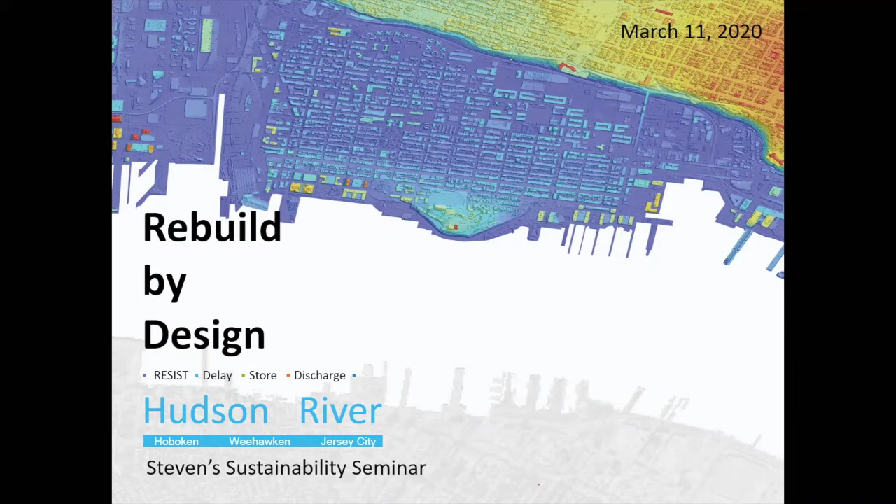Thank you so much, Dibs. And I'm honored to be the first guinea pig, honored to be the first person to be doing this remotely.

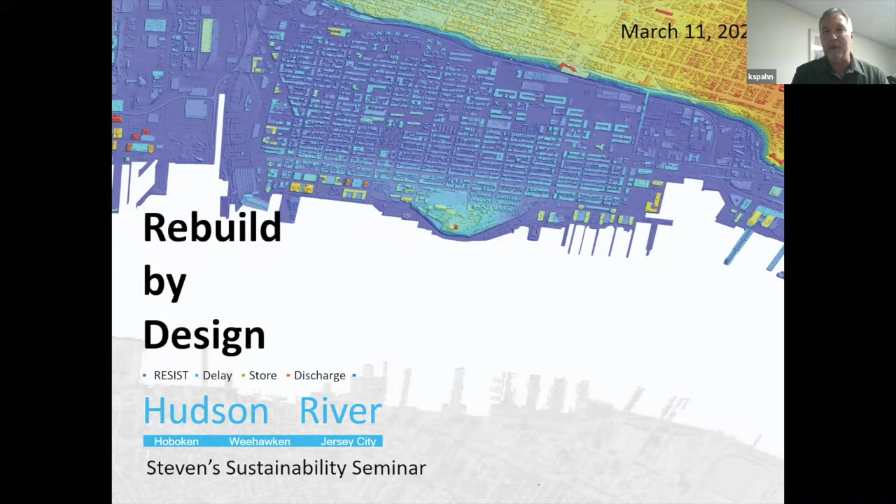So just to go over what we're going to talk about today: I'm going to touch on Superstorm Sandy, since you guys have probably heard a lot about that, but I'll give it from my perspective. I'll talk about the Rebuild by Design competition, which was a large competition for the tri-state area. Then I'll talk about the Rebuild by Design Hudson River project, covering Hoboken, Weehawken, and Jersey City, get into the feasibility aspects and the NEPA process, all the public outreach, how we got to a preferred alternative, and show some results from the flood modeling for storm surge and rainfall.

So, good old hurricane, or Superstorm Sandy I guess - technically I've heard both. I think when it hit it was technically a Category 1 hurricane, and the center of it was right about Brigantine, New Jersey. It was really the worst possible situation because the right side of the storm lined up perfectly with New York Harbor between Sandy Hook and Long Island, which created a funnel effect. We were lucky it was only a Category 1, because it also hit at high tide on a full moon tide, so tides were higher than normal at the time. We ended up with 13.88 feet above normal at the Battery. So it truly was a difficult storm.

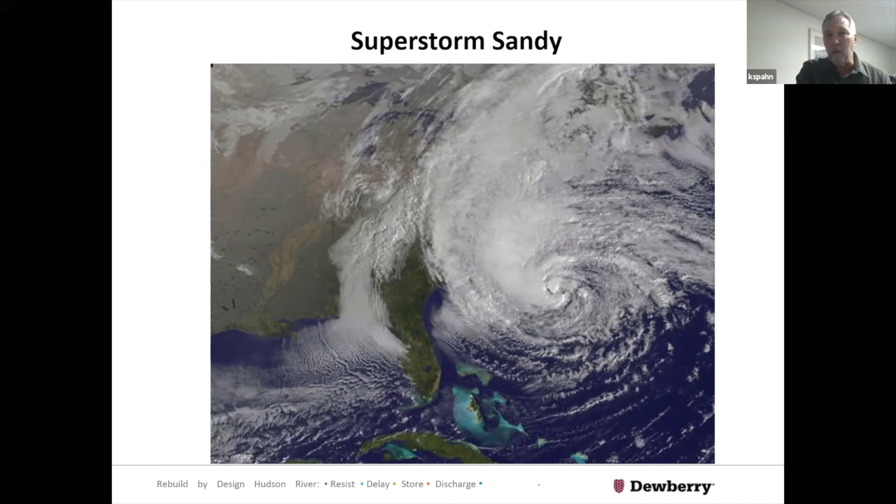These are just some images from the port, because I was so closely involved with it, I figured I'd share it. Containers were strewn all over the place, and some ended up in the water. We had a barge up on the dock in Port Newark, bottom left, you can see the date, November 1st. We also had a snowstorm about a couple days after Sandy that was sort of insult to injury. And in the bottom right, we had a lot of asphalt torn up out in Port Jersey as well.

We had several thousand vehicles that were destroyed as a result of the storm. These were brand new vehicles imported into the port, including Fiskers that got wet. After they started to dry out, there was some corrosive reaction between the batteries and the salt water, and they actually burst into flames. So it was an interesting time. The port was closed for about 6 days, but it really took 6 months for the port to fully recover.

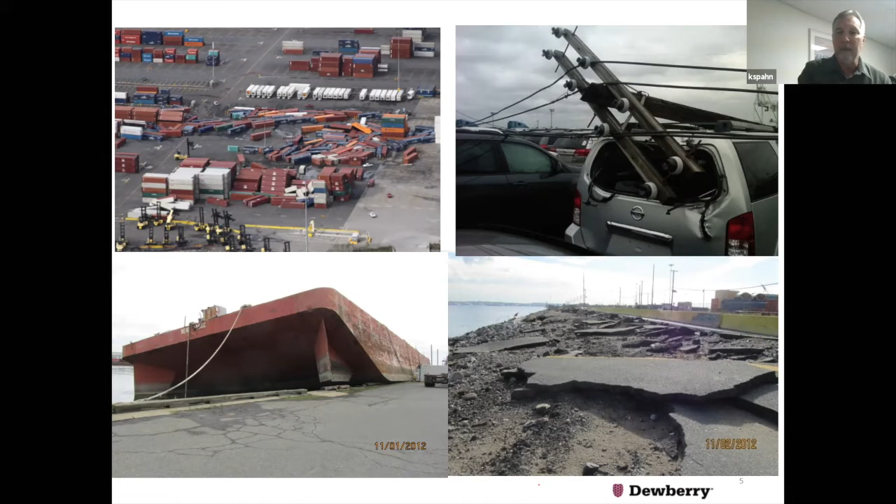So then we're going to move on to the Rebuild by Design competition. I just want to talk about it because I think it's an example of good government. After Sandy, in June of 2013, the Department of Housing and Urban Development of the United States government launched the Rebuild by Design competition, a multi-stage planning and design competition to promote resilience in the Sandy affected region. HUD administered the competition in partnership with philanthropic, academic and nonprofit organizations. Rockefeller Foundation had a lot to do with it, putting up the money for stipends so consulting teams could get paid for their work developing ideas on how these regional areas could recover from or prevent a Sandy in the future.

The goal of the competition was to promote innovation by developing regionally scalable but locally contextual solutions that increase resilience in the region. So in June 2014, $930 million was awarded to 7 different projects. I think there were 10 total submitted, and 7 of them received money. One of those was the Rebuild by Design Hudson River project, for Hoboken, Weehawken, and Jersey City, which we're going to talk about.

I love this image because it was in the package submitted for the competition, and it shows a hot air balloon in the background, a very active waterfront area, an elevated area with people walking around and kayaking and so forth. It was great to win a competition, but this image is not in reality what could practically be designed and implemented. It's just not, and we'll talk about that a little bit, because of the costs of waterfront work, the ownership of the waterfront, and the impacts to view sheds and different things like that. It's a wonderful image, but not really realistic, though it won the competition.

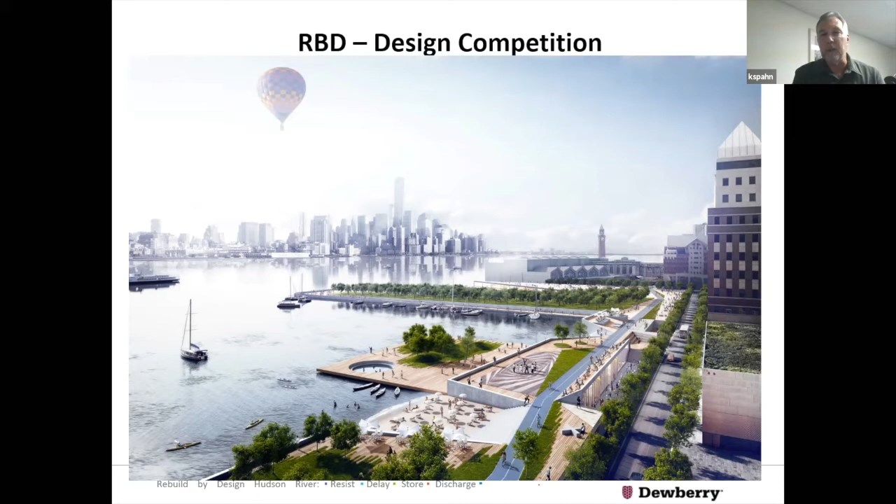So the other main theme of the winning competition, and what we had to start with when we began our feasibility and NEPA process, is resist, delay, store, and discharge, RDSD. The idea is to develop a comprehensive urban water strategy by creating infrastructure to resist storm surge coming in like it did before, and also infrastructure to delay rainfall getting into the storm system, potentially store rainfall so it's not overwhelming the storm system, because Hoboken actually has a combined sanitary and storm system that's ancient, so it does not drain properly. They need more capacity in the system, so the idea was to delay it, store it, and then discharge it mechanically into the river to get it out, making more room for additional capacity.

But that was the key to this project: resist, delay, store, discharge.

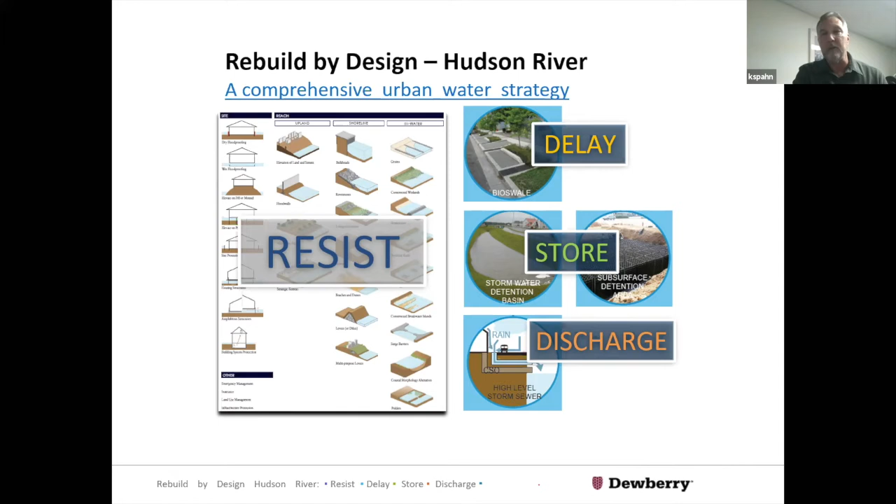So to talk a little bit about the study area: City of Hoboken, parts of Jersey City, Weehawken, about 1.8 square miles, population roughly 63,000 people. This was a number of years back when we started this. There's a major transportation hub in the New Jersey Transit at the south end. Down at the south end there's a little blue line that shows the project area. This is Weehawken, Hoboken in the center, and Jersey City down at the south end. High residential density.

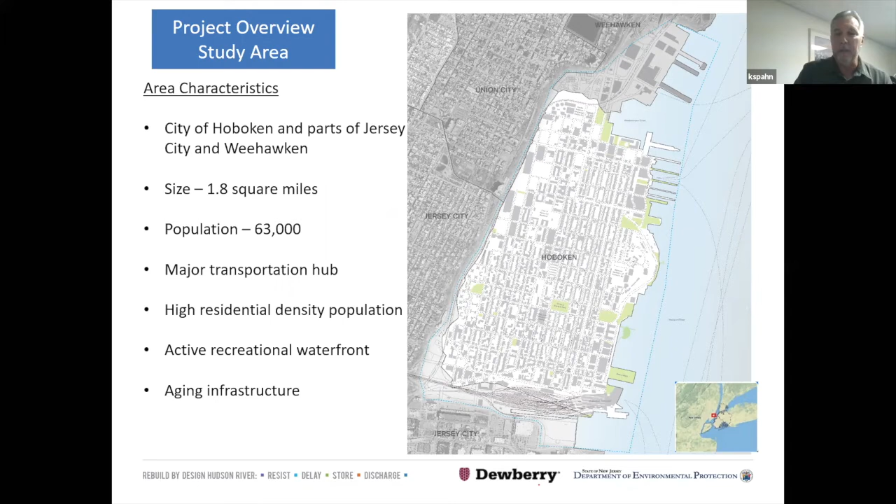It's one of the most densely populated areas in the US. Super active recreational waterfront that we learned a lot about through this project. And then the other piece of it is aging infrastructure. The waterfront infrastructure is not in the greatest shape, so if you're going to build anything on the waterfront, you really need to rebuild the waterfront. And the inland infrastructure, the sanitary system and storm system is old. You guys probably hear about water main breaks in Hoboken.

So flooding risks in this area - the top two images are from Hurricane Sandy, and you can see going underneath the bridges coming into Hoboken from Jersey City, the area was just inundated with flood water. Luckily it didn't rain much, it could have been worse. Hurricane Irene did not have the storm surge effect that Sandy had - it hit at a low tide. However, they dumped over 5 inches of rain in a very short period of time. So some areas flooded almost as bad during Irene as they were during Sandy.

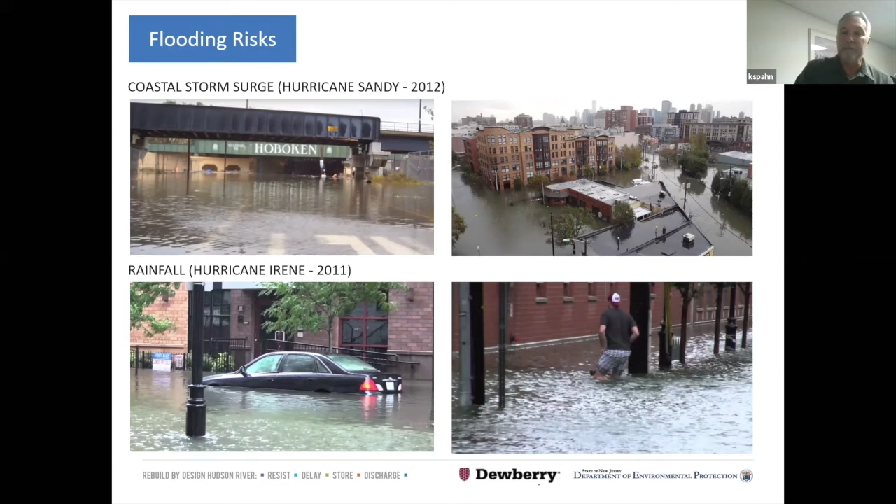So why do we need the project? This is a map that shows the 100-year FEMA flood area, in blue. Most of Hoboken is in that 1% annual chance, meaning there's a 1% chance basically every year of this 100-year storm coming and flooding that area. Where Stevens is located, Castle Point is the highest area in the city. I'm told that when the Dutch settled this area, a lot of that blue area was swampland and was filled in over the years, so Castle Point was more of an island.

Then there are some crosshatched areas that show where we have rainfall problems, where there's no storm surge but you get a heavy rainstorm. These are hot spots where it's a problem locally. The damage from those rainstorms isn't like the damage from a major storm surge, but it's still nuisance flooding that needed to be addressed with this project as well.

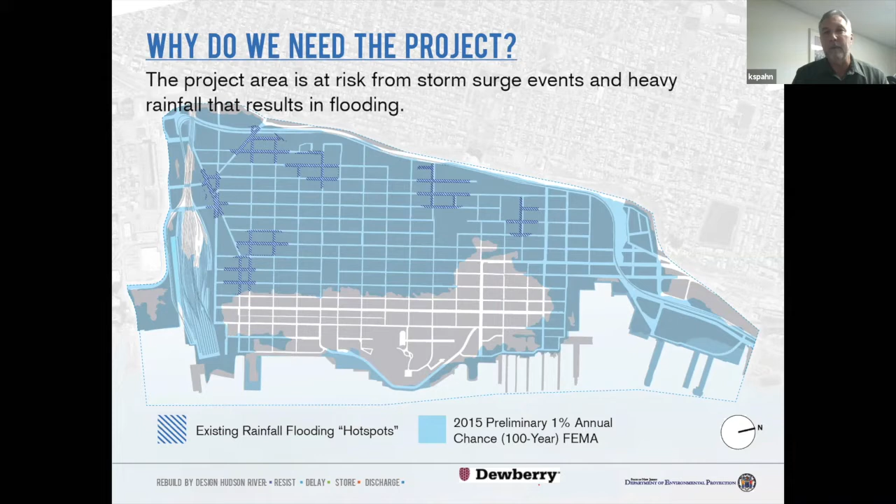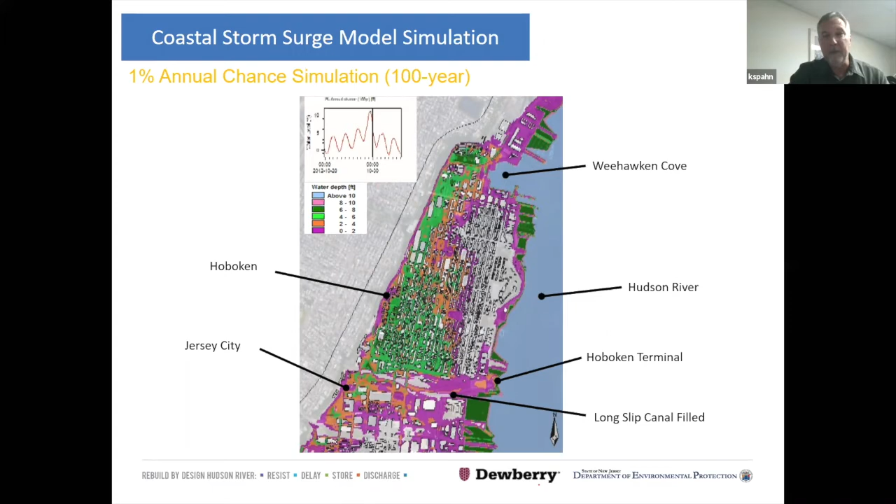To talk about the overall project schedule: when we started, the Rebuild by Design competition was in June 2014. It took about a year for that award to get made, and then some time for us to get on board and start the feasibility and NEPA process, which was really a 2-year process - very short for NEPA. What's key is the engineers working on feasibility have to work very closely with the planners working on the NEPA process, because the engineering information feeds the NEPA process. That's really important for them to be in sync in order for us to compress the schedule. Often this could take 5 years, or a lot of the engineering work needs to be done up front before you can even get into the NEPA process.

And then the final design has been going on - it's pushed out a little bit. I think they're getting ready to award a construction this year, not 2019. That's not surprising because this is a very complicated project.

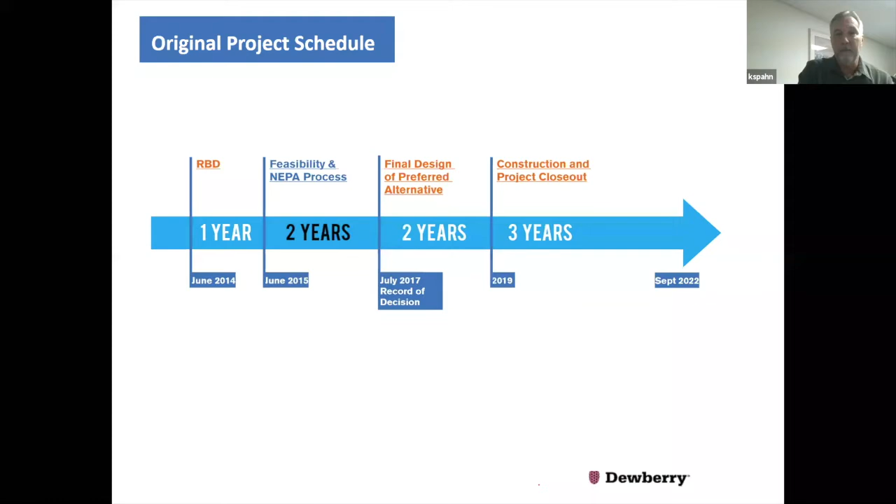So just to talk a little bit about NEPA, what it is: NEPA was created by an act of Congress and authorized by President Nixon in 1969. The idea is it ensures public participation and involvement with projects that will affect both the built and natural environment, to minimize impacts and stimulate health and welfare of man and the ecosystems. So anytime you're doing a project, particularly using federal dollars, which is what this 230 million is, you've got to go through NEPA. Whether that changes in the future or not, who knows.

But you start out with, what is the purpose and need? The idea is to get people involved—public involvement is key to the entire process—and people that live and work in these areas agree on why we're doing this and why we need it. You need to develop your scoping: what are the goals of the project, how do you want to end up, and what are the deliverables?

And then talk about what's the environment that's affected, what are the impacts, and how can you mitigate it. And then look through different alternatives and different ideas. Finally, come up with a preferred alternative, and then there is an actual record of decision where there is a public hearing. It's actually the only required public hearing for the record of decision, but it's better practice to have several public hearings through the process. Once the record of decision is signed, the project is approved to move forward.

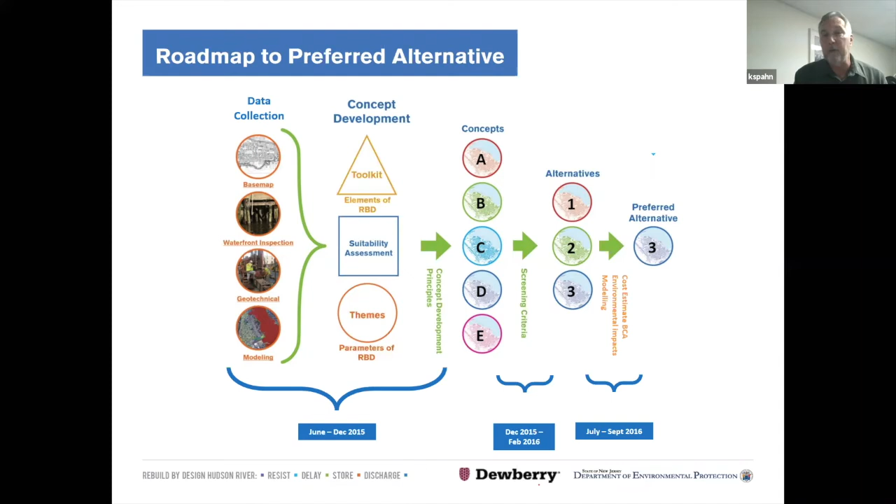Things you need to consider when you're developing the different components of this is, what are the existing initiatives? At the time, Hoboken was just starting the redevelopment of Washington Street.

Some things it's okay to be wet. Some things have to be dry. There was a boathouse being planned for the Weehawken Cove or Hoboken Cove area. How would it impact bike share programs? What are the impacts with the views and the height? Are there shading issues? What's the seasonality? What sort of material would be appropriate to use to maintain the urban identity?

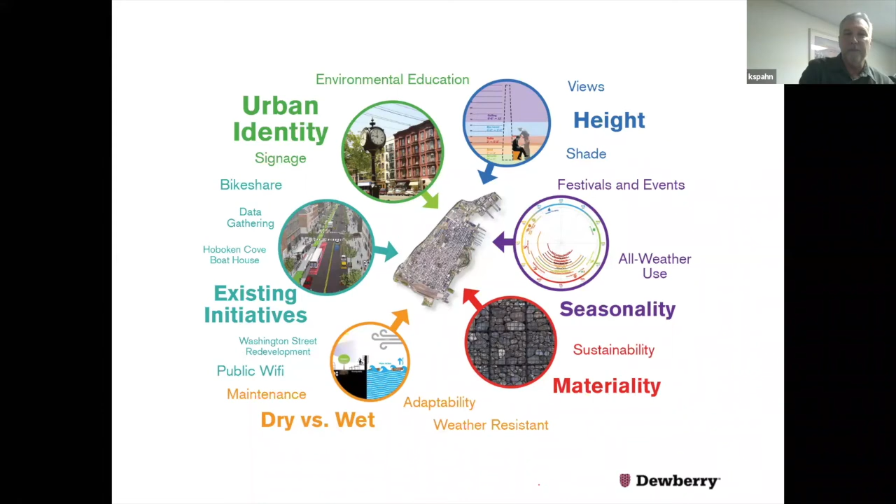Some of the major challenges with this project: number one, it was a very active waterfront. So we learned pretty early on in the project that doing things along the waterfront were going to be difficult for a number of reasons, mainly existing access that people have, views that people have, condition of the waterfront, property rights of the waterfront. But really, it was sort of a sanctity to not do anything to impact access and availability of the waterfront.

The roadways and bridges, it's just a busy area through Hoboken. And when you're looking to create basically a flood revetment around the city or around the project area, you want it to get certified by FEMA so that folks on the other side of that revetment will get a reduction in their insurance rates possibly. So roadways create, through the area, and particularly through wherever the resist features are, create a pathway for water. So it just made it tricky.

And then infrastructure density - there's just not a lot of space to build anything in this project area, so it did create some challenges. Circulation is also a major issue, just for constructability. And things like impacting the number of parking spaces, because they're near and dear to people. So it's important to maintain circulation with whatever you're doing.

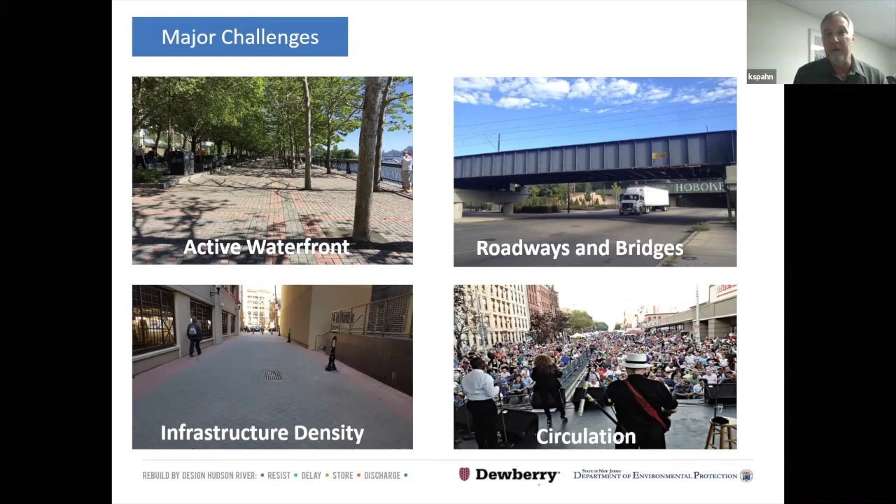So the evaluation criteria we were using - the primary evaluation criteria is the flood risk reduction. We have alternative 1, 2, 3. What level of flood risk do you get from each alternative and how do they compare? What are the socioeconomic and built environment impacts of the different alternatives? How does it affect lower income neighborhoods? How does it affect the waterfront areas?

Then benefit cost analysis is really important when it comes to funding from the federal government, to have a positive benefit cost analysis. So out of the different alternatives, you have construction estimates, cost estimates, and you have the impact of the storm. So what costs are you averting by making this investment, and what does that come out to in terms of your ratio for your benefit cost analysis?

And then, is it constructible? And can you maintain it and operate it? Those are all factors that you're considering when you're evaluating criteria for a different alternative, and then ultimately environmental impacts get looked at across a broad range of different environmental type issues.

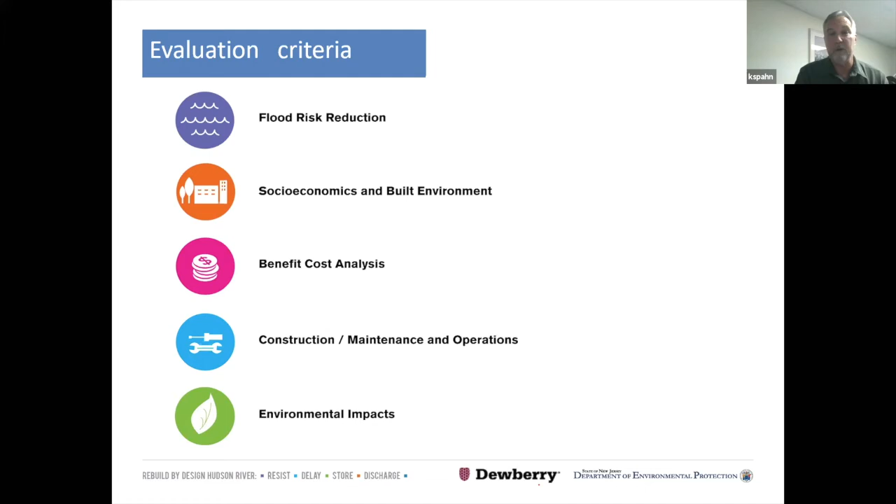So the three resist alternatives that we came up with: alternative one was the waterfront, shown in the orange line, and it would be a rather high structure. The structure could be built into the landscape at some levels, but in some areas there really wasn't enough room other than it just being a structure.

One of the things we learned is we don't call these things walls, these are resist features. But the reality is, in some areas where there isn't room to do anything else, like along the waterfront, it'd be a nice looking wall, but it would end up being a wall. And that is not something that's preferred by people.

The second alternative, like most of these alternatives, started at the north end and tied into the Weehawken light rail station. As you can see, the orange one comes down along the waterfront. Alternative 2 and alternative 3 are more like inland alternatives, very similar. One goes along 15th Street, one stays along the light rail tracks. Then they all come across Weehawken Cove similarly.

The idea was, there's an empty lot here, so the idea is to build a park and build into that park a resist feature, an elevated resist feature, and then the route comes down through an alleyway where there are no vehicles. There were definitely some benefits to this, because it does not affect the roadways or parking or anything coming through that alleyway.

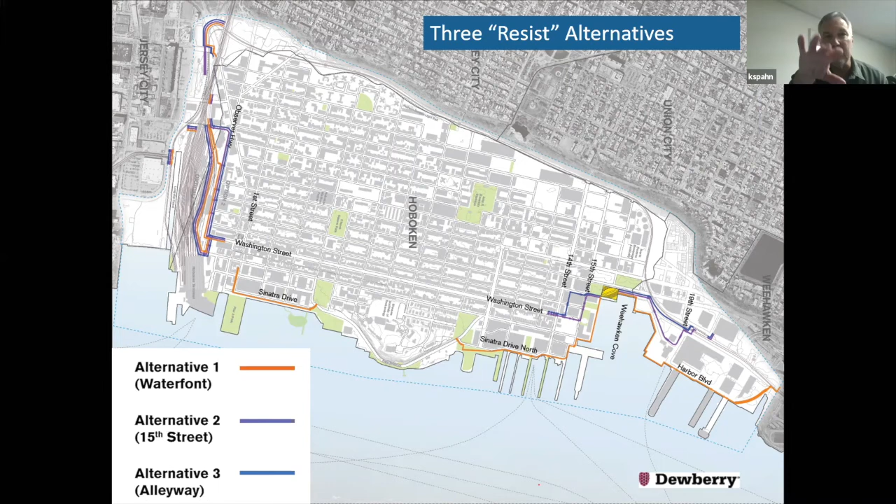So also for delay, store, and discharge, we really only had one alternative for that. Unlike the resist feature, there were some different ideas, but there were basically known areas that flooded in the project area, so there just weren't as many alternatives.

So what we looked at was what we called at the time the BASF site, putting in a below ground storage tank to handle rainfall runoff for the area in the northwest. That just recently has gone into construction. There was a press release a few weeks ago - they call it the Northwest Resiliency Park. So that's actually happening now.

The city of Hoboken was able to move that forward because there wasn't money for that in the Rebuild by Design grant - there was only money for really the resist feature. The idea behind the Rebuild by Design grant was to kind of jumpstart things, but some of what's being recommended here has to be followed up by the local community.

We also looked at a New Jersey Transit site for storage of water in an area that floods in these apartments back here - just calling it the New Jersey Transit site because New Jersey Transit happens to own the property. And also a Block 10 site, which is adjacent to the Southwest Resiliency Park.

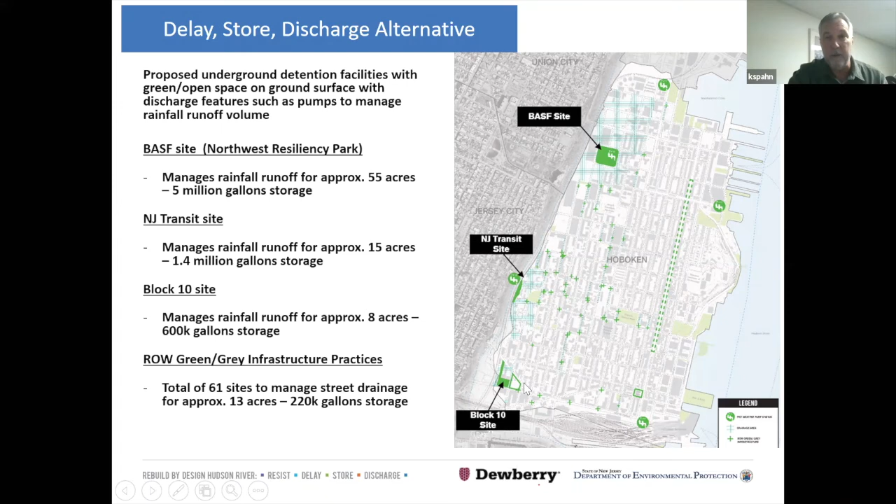There's also a number of things the city of Hoboken has done, and the city of Hoboken is really trying to do a lot to improve flooding, particularly from rainfall. They've added pump stations down in the south end, and a few years ago completed the H5 pump station. They've added some rainfall water gardens on Washington Street, and I mentioned the Southwest Resiliency Park. So things are moving in the right direction in Hoboken.

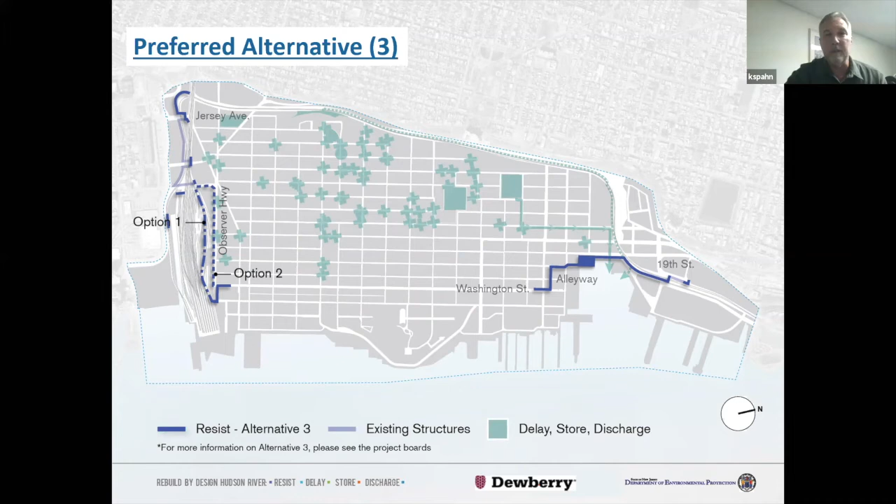So the preferred alternative is the alleyway alternative that goes from the light rail station in Weehawken down across the cove and up a ways onto Washington Street. Then there's a couple of options - they're actually moving to something like option 1 here. And then also all the resist, delay, store, and discharge pieces.

Alternative 3 had a high degree of flood risk reduction while balancing public input, costs, and urban amenities. It can be constructed with the available funds, though that's going to be a stretch. They may need some additional funds, but it was the cheapest alternative.

It had fewer gates, because gates are expensive and are maintenance items, so it had the fewest number of gates of any of the alternatives. That means the lowest annual maintenance and the least impact to waterfront access and views, which is critical to the folks that live there.

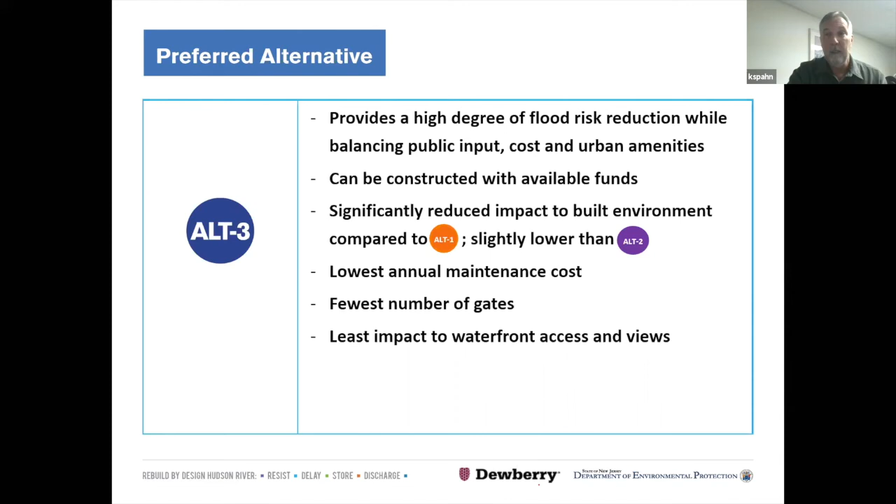Some of the delay, store, discharge alternative features: the Northwest Resiliency is more like a destination, a place where people would go, picnic, and hang out. We looked at more of a passive approach for the New Jersey Transit site, something you can look at that creates a green area to hold water. The Southwest Resiliency and Block 10 is more of an active area, with basketball courts and things like that.

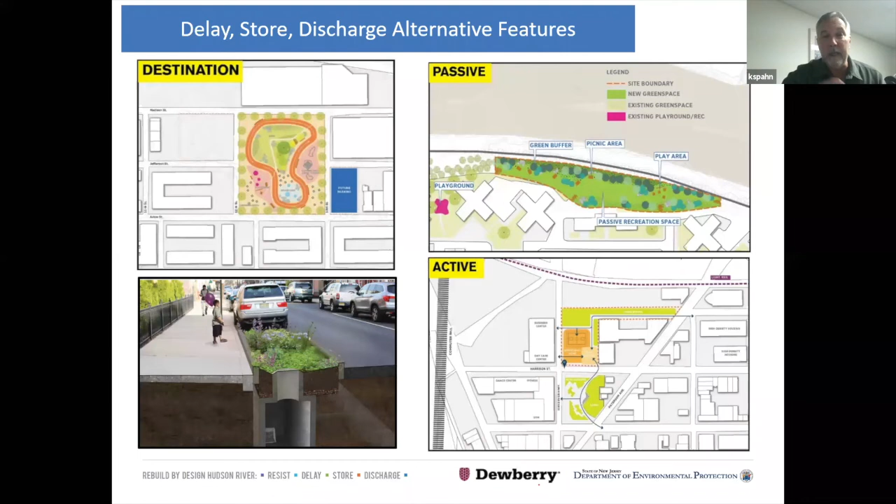The right-of-way sites are just small local features where there could be some bio-attenuation of water into the storm drain, or something else I'll show you in a minute. This is actually an image of the Northwest Resiliency Park that is moving forward today.

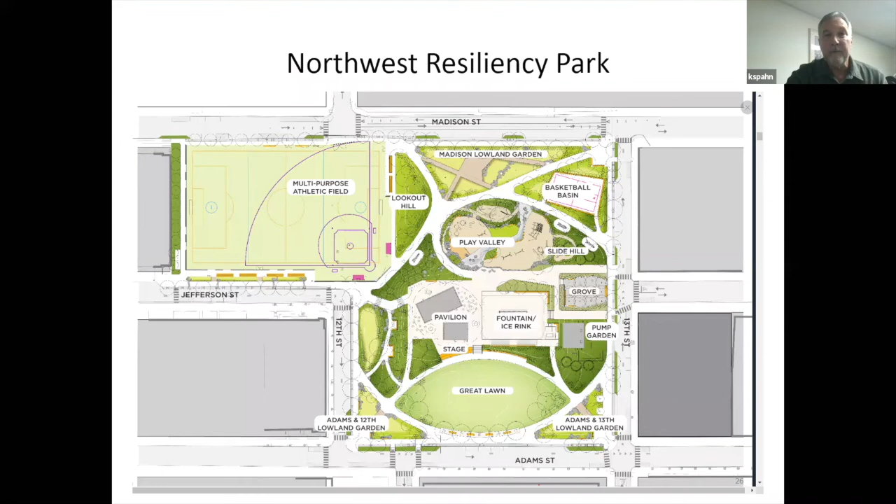So quickly, I'm going to do some modeling here. It's not working. Dibs, are these the technical problems you were talking about? Oh, this one looks more like... oh wait, yeah, I'm sorry, I have the wrong one. You're right, very good, yeah, this is not it. Come here.

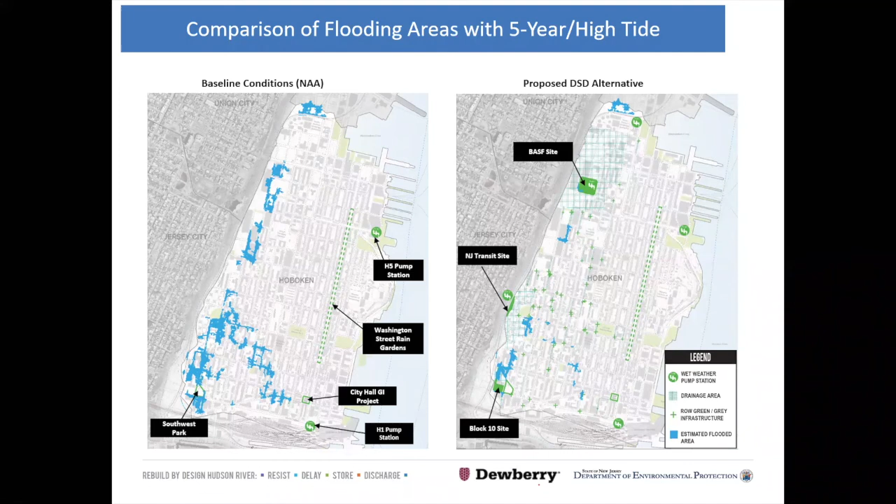So comparing the flooding: this is a 5-year rainfall event happening during high tide. It matters whether it's high tide or low tide, because the storm system fills with water during high tide, so there's less capacity for water. On the left is the baseline conditions with no action, and on the right is with the delay, store, discharge alternatives installed. You can see there's less blue on the right than the left, showing significant improvement with the Northwest Resiliency Park, the New Jersey Transit site, the Block 10 site, and these small right-of-way improvements.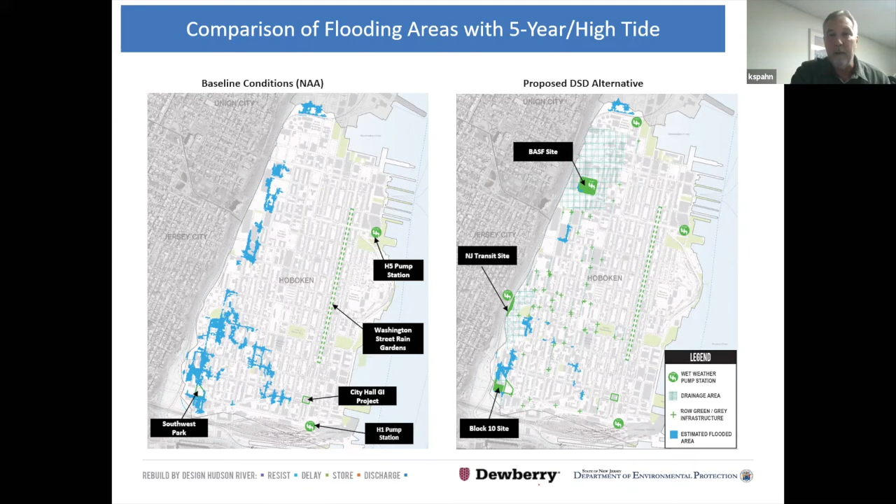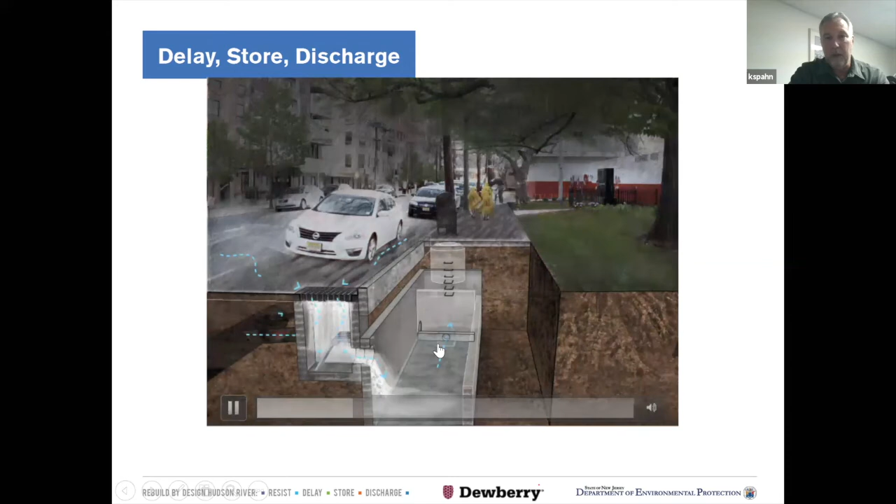This is the model of what we're calling the right-of-way improvement, where you'll see water going into the catch basin, with a tank accompanying it. When it starts to rain, it's a little slow—water fills up, then goes into this hole through the weir, allowing water to get into the storm drain system, but slowing it down. In the meantime, you've got capacity to hold the water.

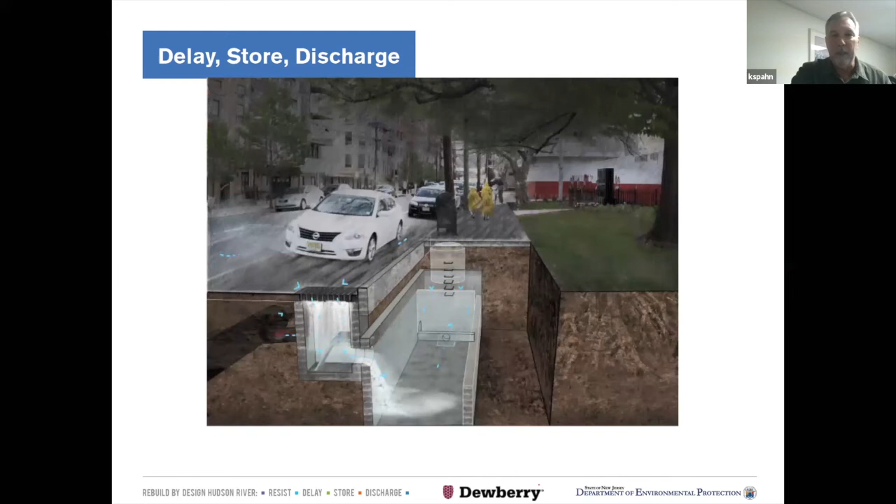You can see it filling up—so during these summertime deluges, rather than it backing up onto the street right away because there isn't capacity in the system, you can hold some of it. But at some point, these local tanks will fill up and spill over the top of the weir. It's just an improvement that adds to the overall resiliency of the area.

Quickly going through the layout: the alignment for the resist feature comes through the park here, goes up Garden Street, then through an alleyway through these buildings where there are no vehicles, and up Washington just past 14th. The idea is to build something that fits into the elements, culture, and aesthetics of the existing buildings and activity happening there.

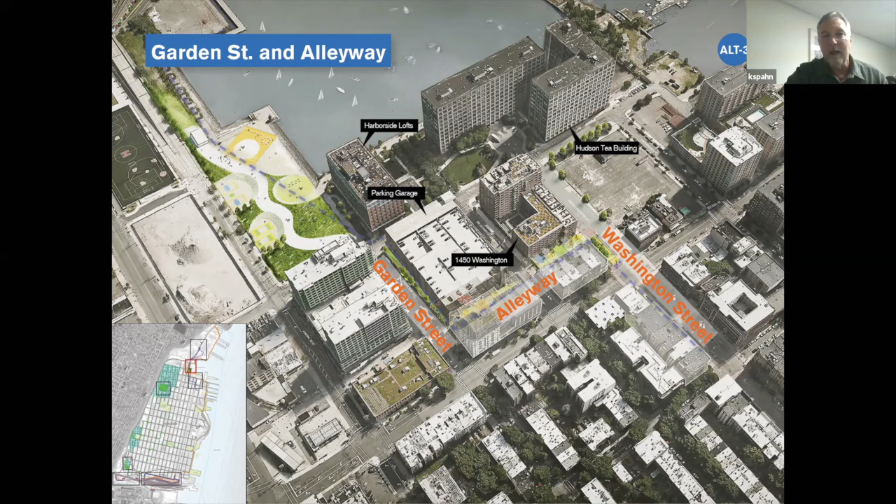This is sort of a before picture of where the park is going to go. As I said earlier, it's an empty lot today, and this is what it will look like in the future.

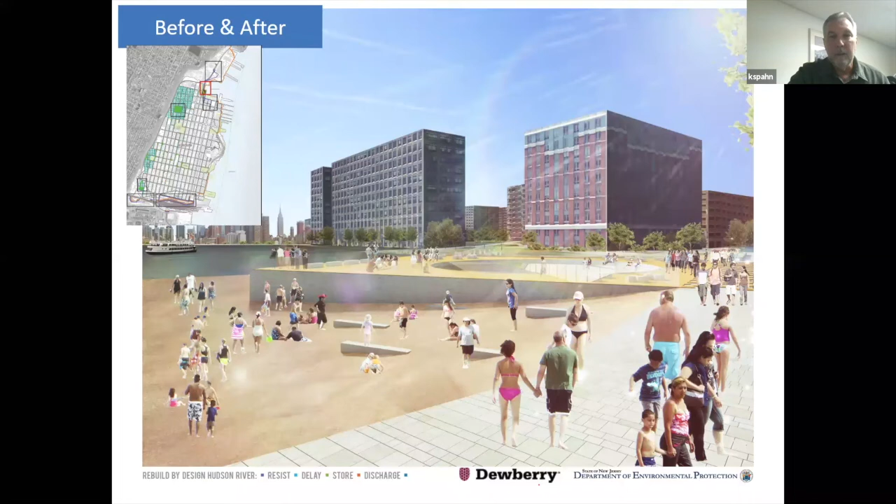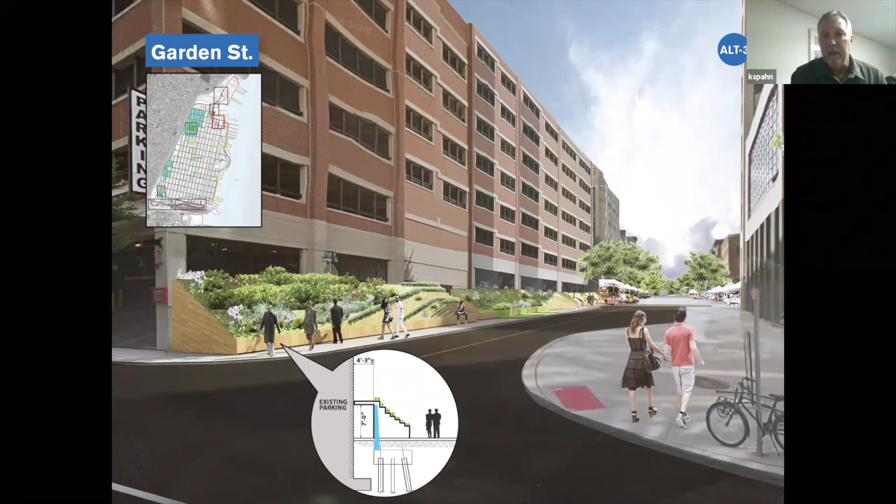This is along Garden Street, up against a parking garage. That planner, and this may not be exactly what it ends up being because they've spent the last couple of years refining exactly what sort of a revetment or resist feature they're going to put here. But this is something that we came up with that people were satisfied with. It could change a little bit from this.

This is looking at the open air market right off Garden Street. Garden Street's kind of a dead end. So this is the area of the open air market, and we're looking into the alleyway heading east. This brown planter is an idea for the resist barrier. In that area, the resist barrier is only 2-3 feet high, maybe.

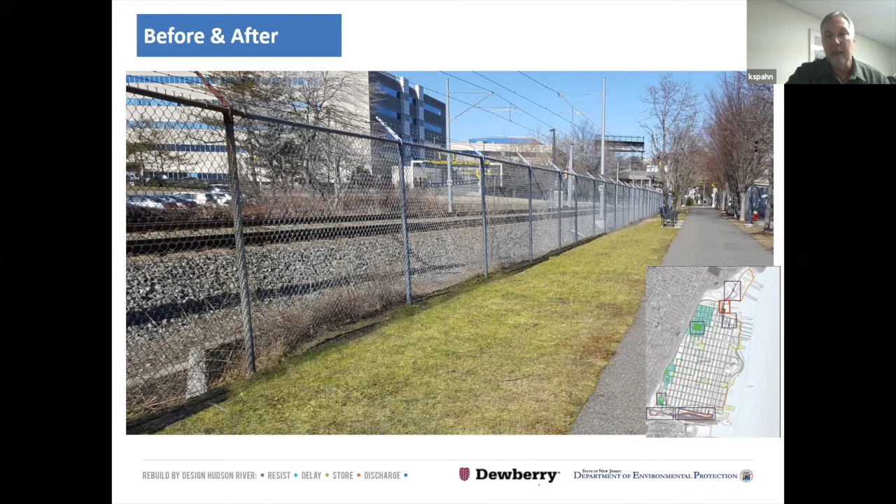This is the area to the north by the Weehawken train station, and it's the before, and then it's the after. You can see the height of that element there is pretty high because that's a very low area.

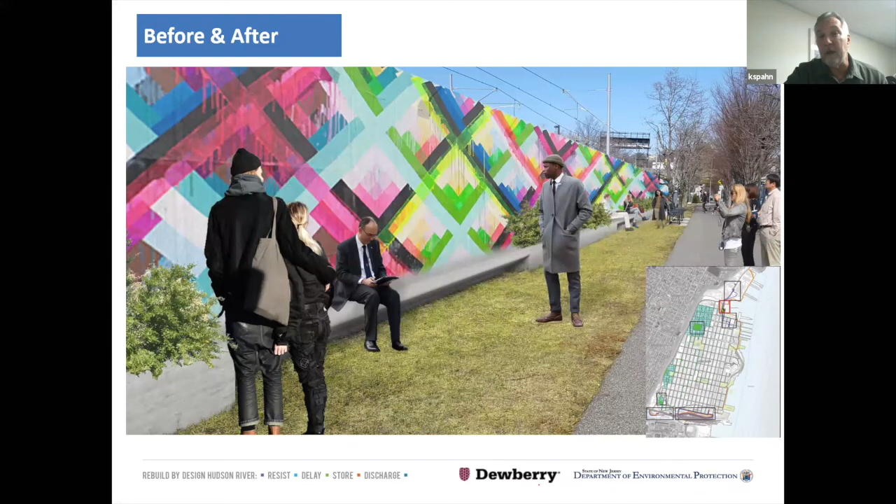And as I had mentioned, these areas of the western part of Hoboken, and the problem with Sandy was that they're lower. The elevation is lower there, and so water just kind of fills in and sits there.

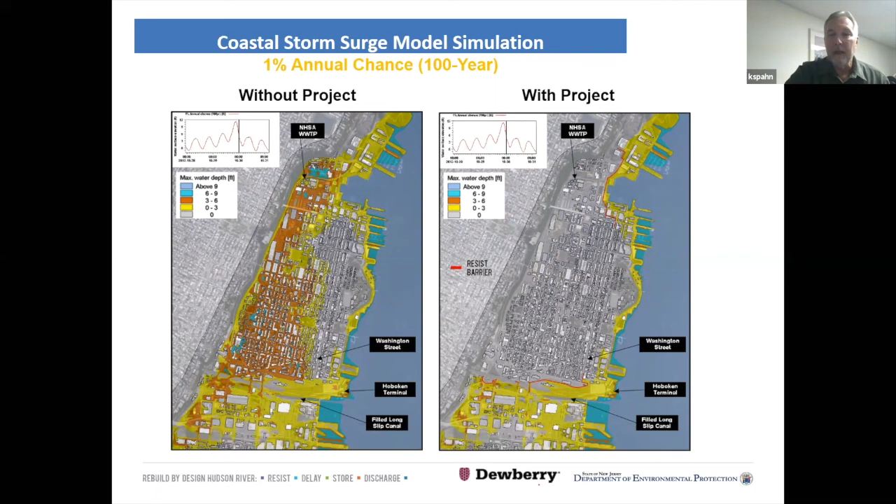Think of Rocky theme music while you're watching this.

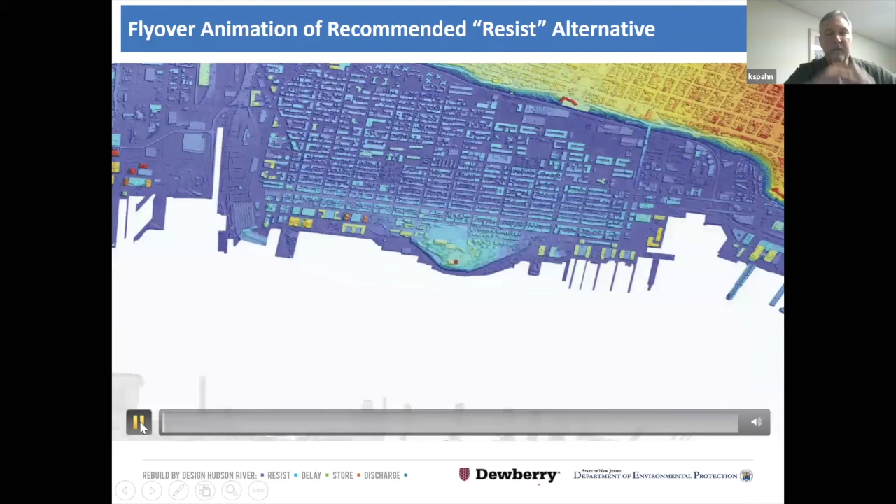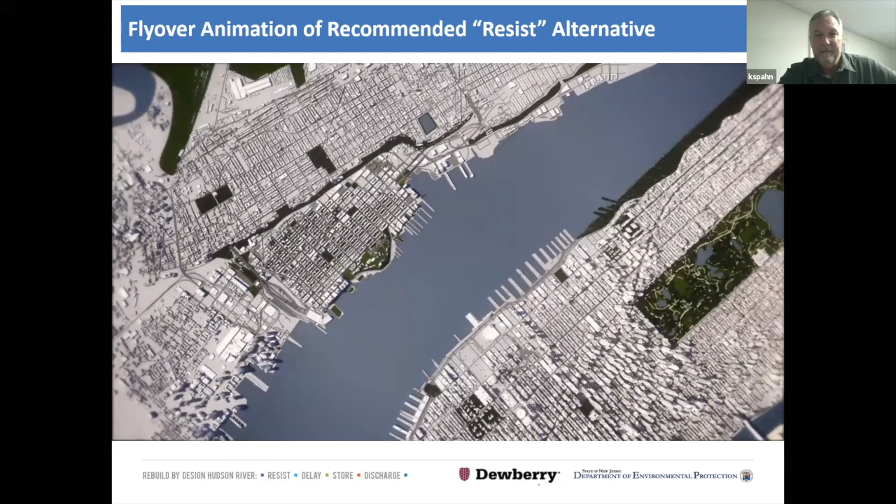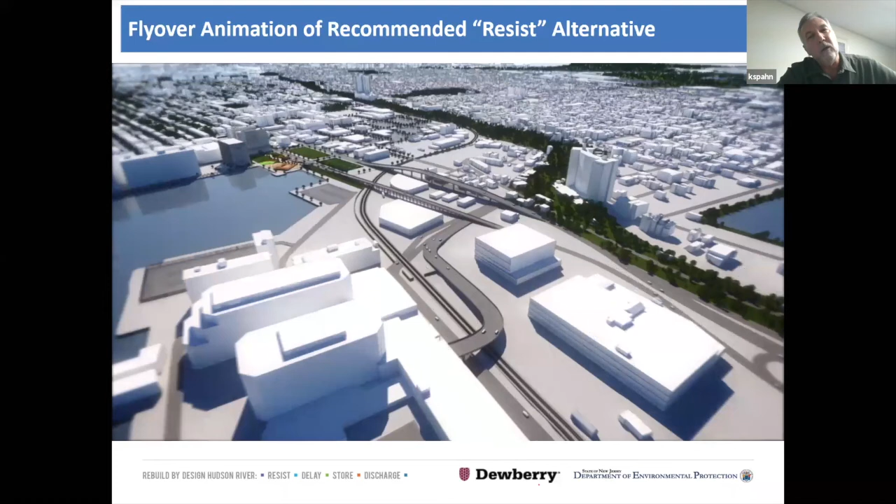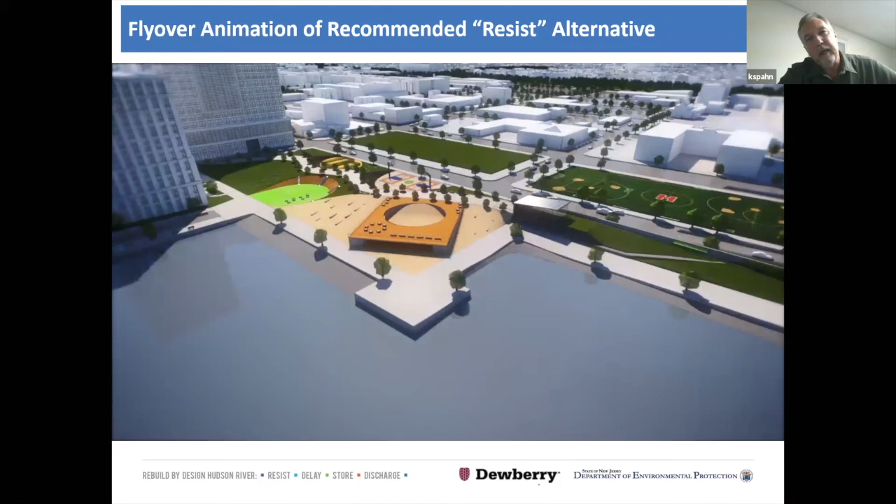So we're zooming into the Weehawken area. We're looking along the light rail tracks, you'll see a revetment in that area. And then we're coming across into the Weehawken, Hoboken Cove area. On the right, there's the boathouse and the park will be constructed over the next few years. There's sort of a curved spine through the center of it, which is the elevated piece.

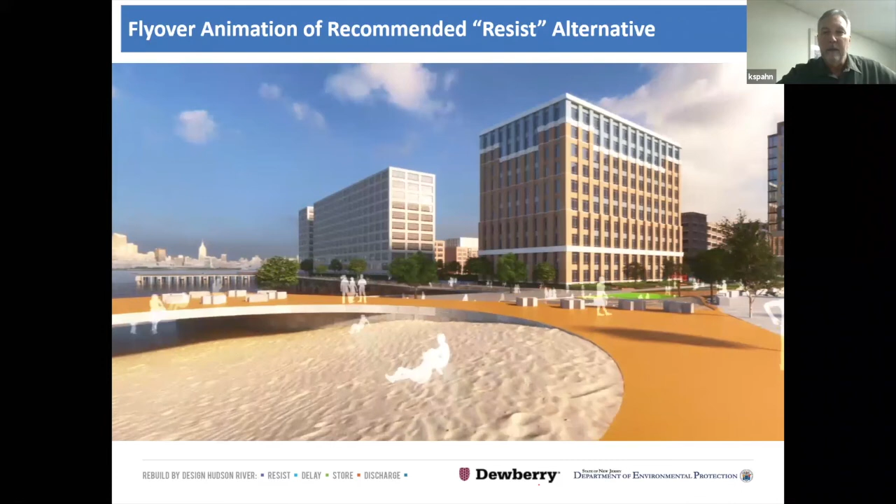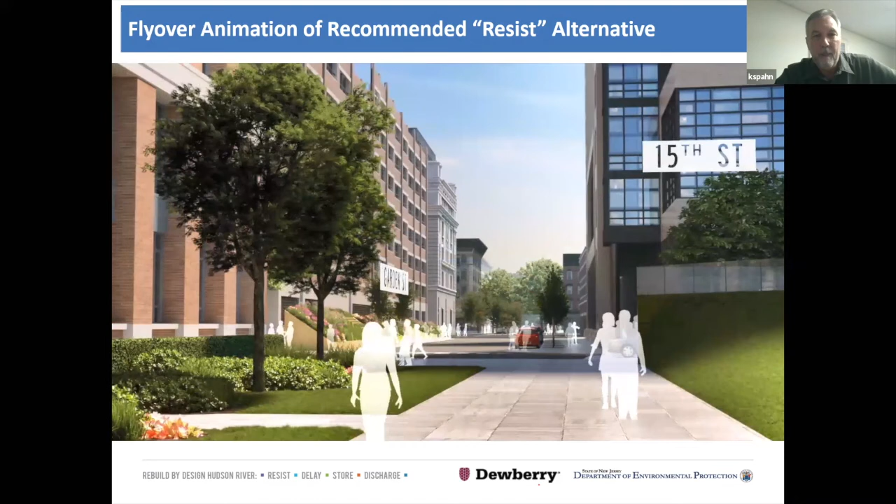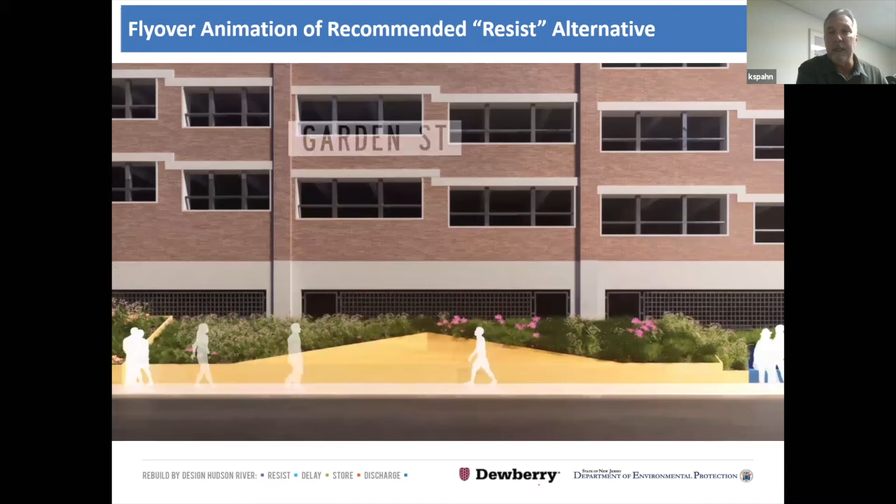The other thing you'll see is some images of gates. This is looking up Garden Street. There's a gate kind of coming across 15th Street. These gates, the design will be set back into the resist feature, so when the gates aren't being used, you won't see them.

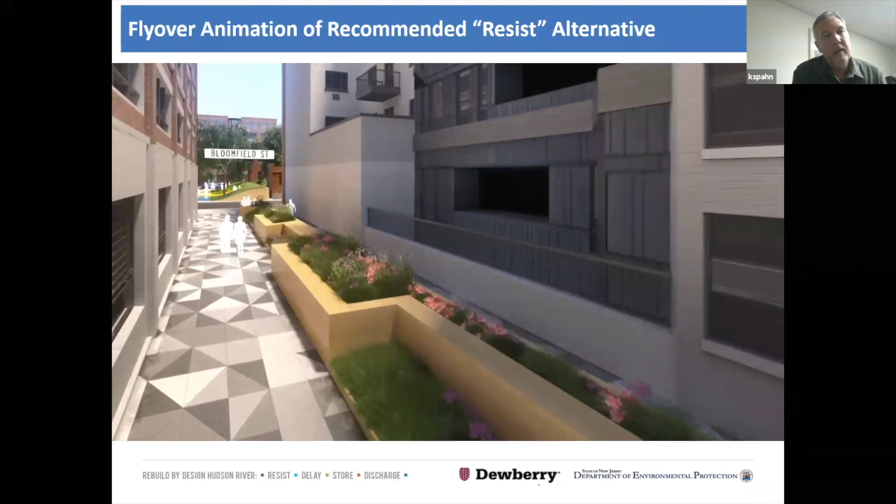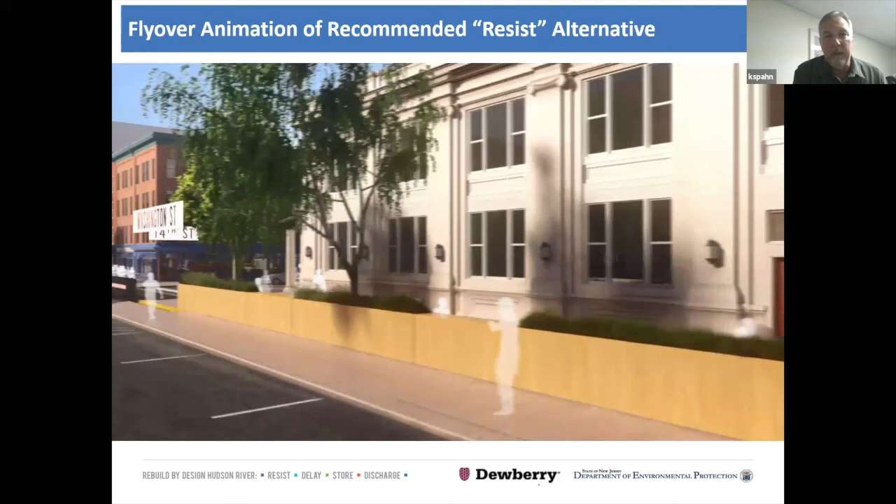This is the alleyway area, and this was an idea for the alleyway. Again, this is part of the alleyway. There goes the gate. And now we're going up Washington Street, just past 14th.

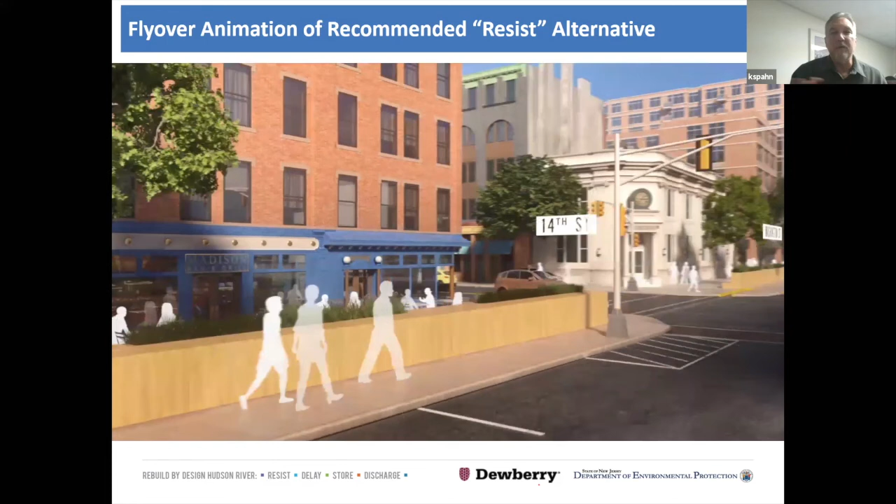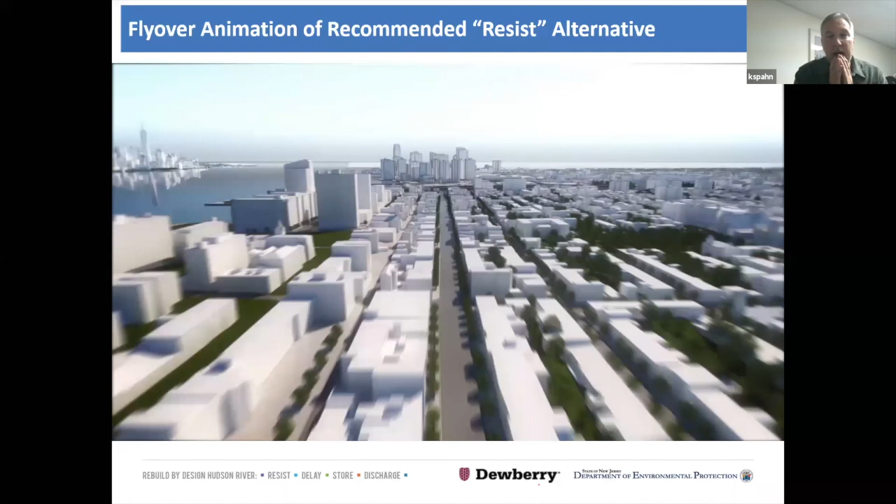The interesting thing is a lot of the structures that are along the water, the first floor of those structures are parking, and so they really weren't impacted by Sandy. So the people that live in those high rises really didn't care that they're inside of the flood zone because where they live is above the flood zone. So suppose they can move their cars.

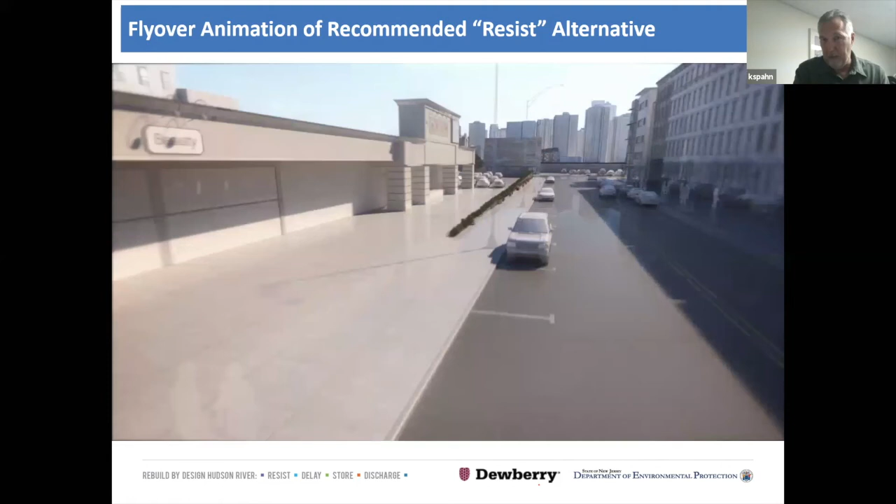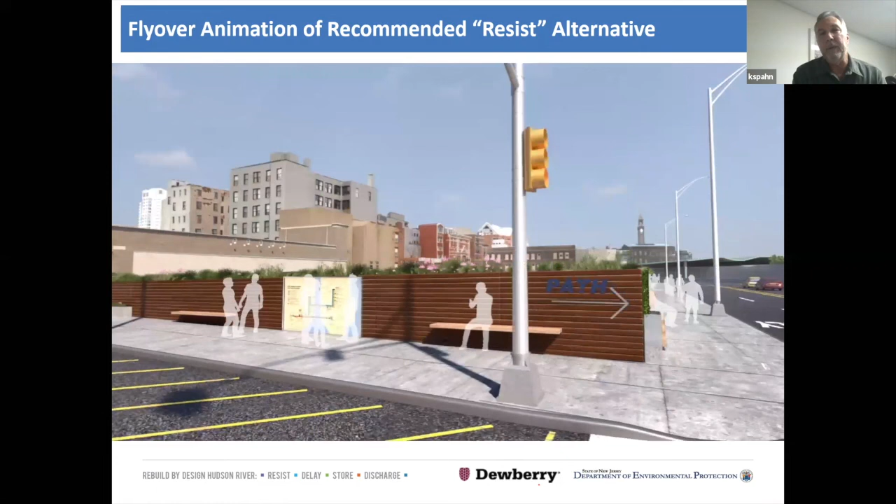So here you can see the resist feature getting higher as you get to a lower area. We started a little bit up Washington Street, and then it peaks in this area in terms of the height that it needs to be.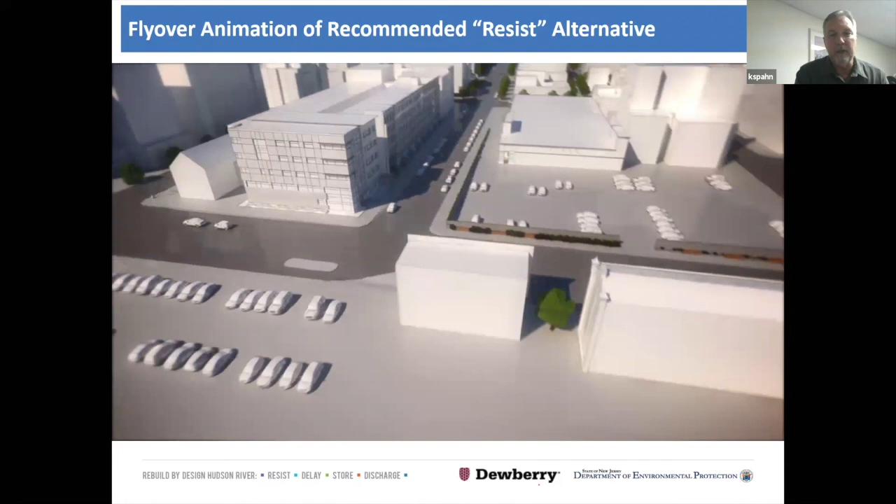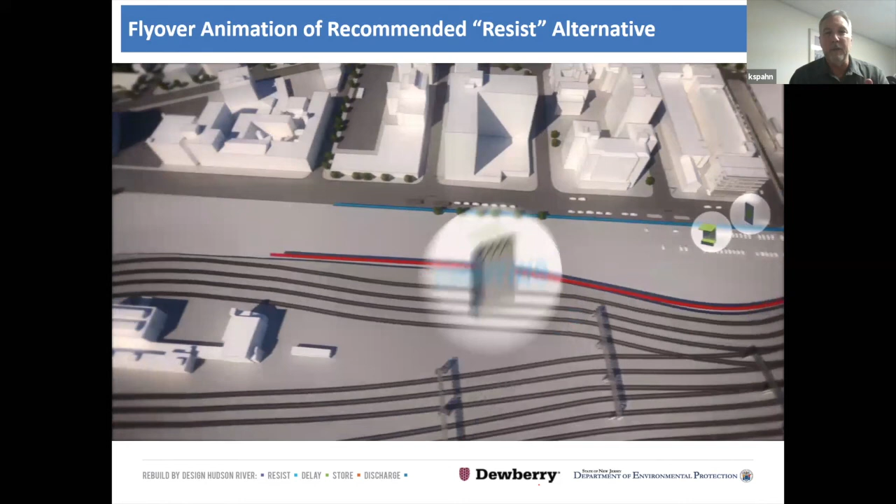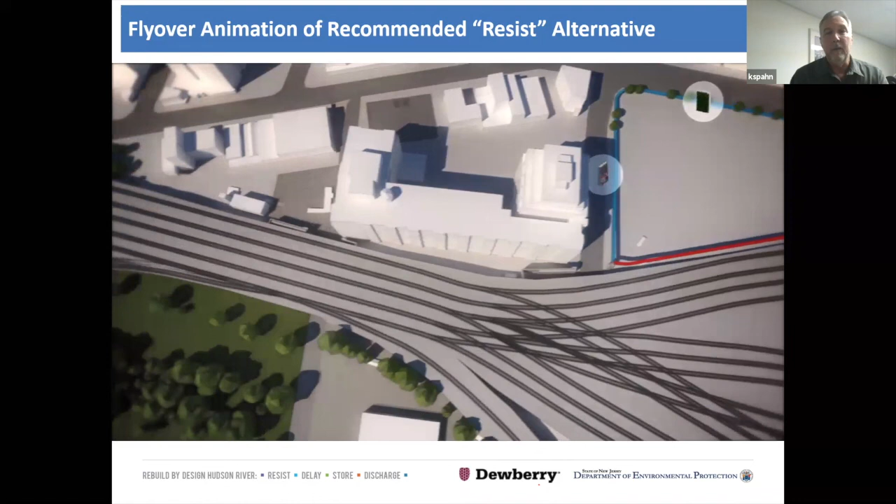And then we come along the New Jersey Transit Station where there's two different alternatives. At the time of this, there were two different alternatives. We were leaving it to the people that live and work in the area to determine exactly what they want these features to look like, but we just sort of gave them different ideas. There isn't a lot of room to do a lot here, but there were two different alternatives, and they finally decided on one, which is a little bit of a modification of these two.

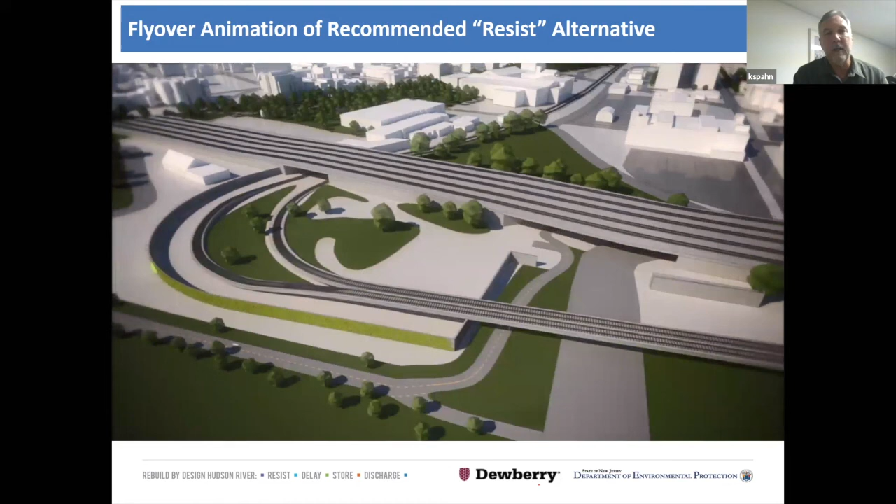And then this is the southwest area where the light rail tracks go underneath the New Jersey Transit tracks that leave Hoboken.

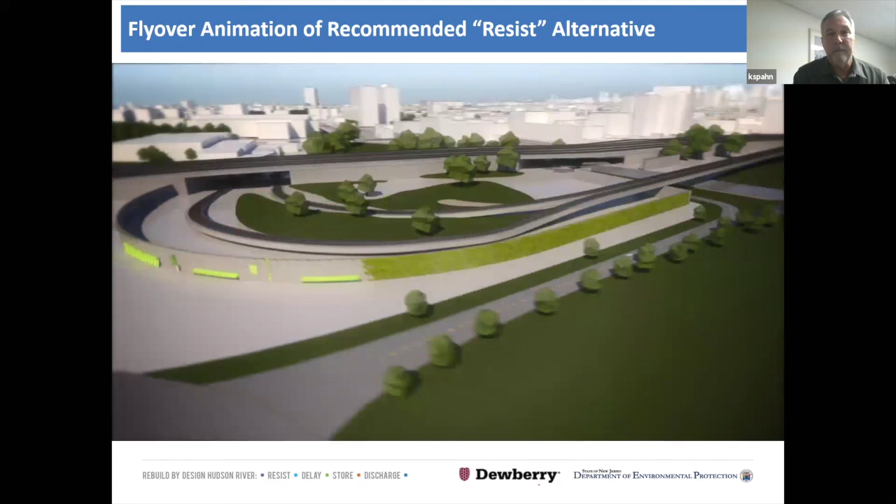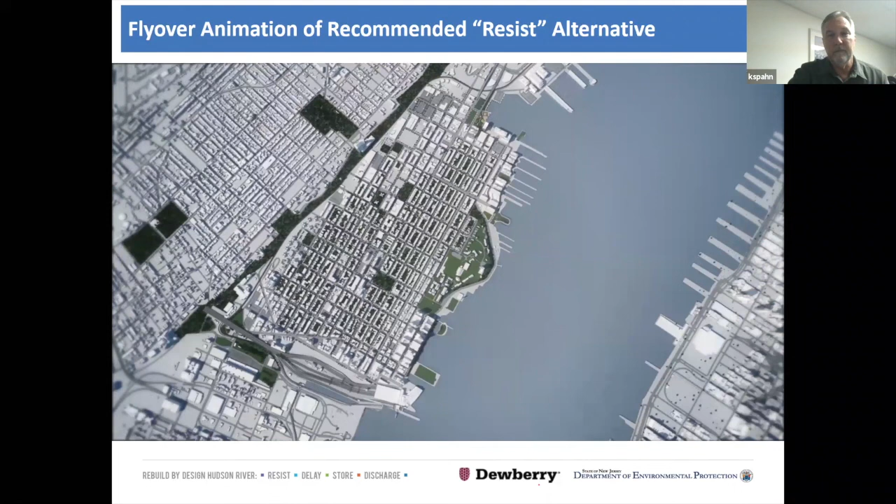So that is my presentation.